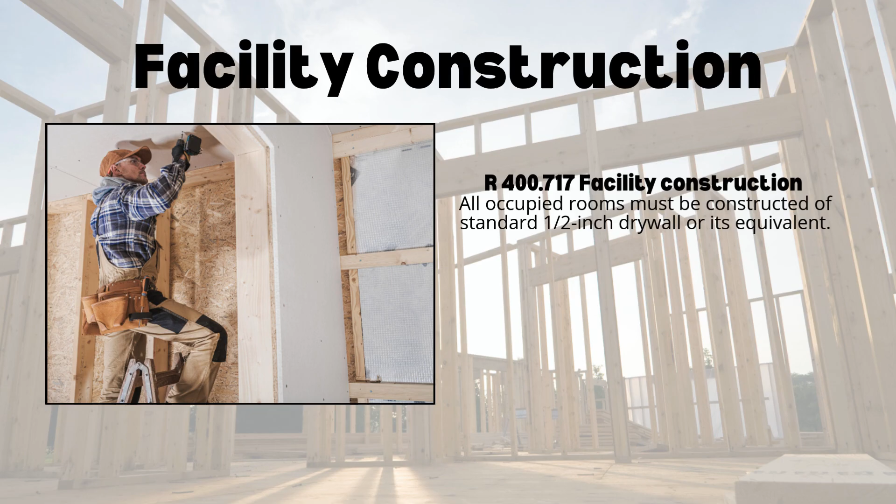Interior finishes must be at least Class C materials throughout the facility. Interior finish materials must be securely attached to or furred out not more than 1 inch from walls or ceilings that are drywall, plaster, masonry, or natural solid wood that are not less than 3/4 of an inch thick.

The term throughout, as used in this requirement, means the entire home, including all rooms, basements, and attached garages. Any materials covering the basic interior construction, such as wood or vinyl paneling, ceiling tiles, or the like, must minimally meet the Class C classification.

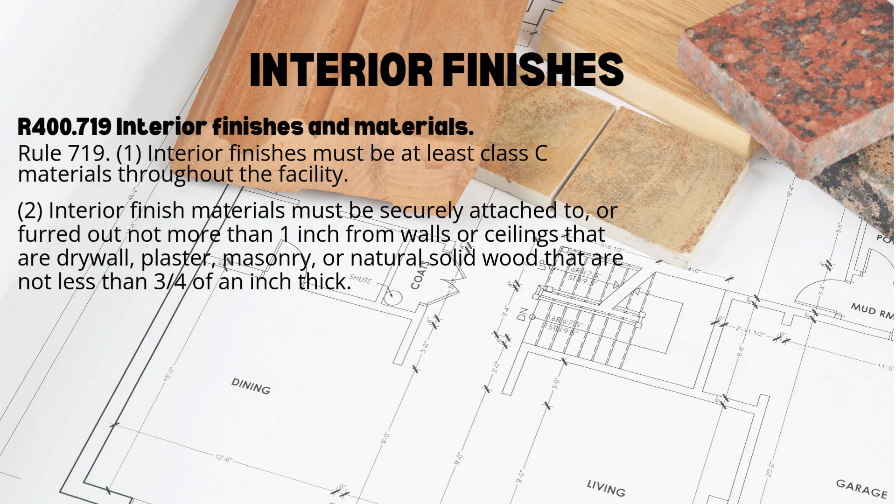Documentation from the manufacturer's literature provided by the licensee may meet compliance with this requirement, or it may be stamped on the material.

Wallpaper is permitted if the applicant licensee is able to provide verification that the wallpaper meets Class C classification. The coating of paneling to achieve a Class C finish is prohibited for applicants, change of ownership, new construction, or conversions, since it is not possible to determine whether the coating was applied and maintained in a manner that would achieve a Class C rating.

Interior finishes in existing licensed homes that have been coated with a fire-retardant coating and previously approved are acceptable. For those homes, licensees must be able to provide information as to what has been done to maintain the coating at each inspection. Generally, fire-retardant coatings do not maintain their effectiveness when washed or when brushed up against often. Fire-retardant coatings are to be reapplied on a routine basis as required by the manufacturer's specifications.

It is strongly recommended licensees keep all documentation of interior finishes, class ratings, and fire-retardant finish materials used in the facility.

Attaching of interior finish materials other than drywall, plaster, or natural solid wood that is not less than 3/4 of an inch thick directly to wall studs or to floor or ceiling joists is prohibited.

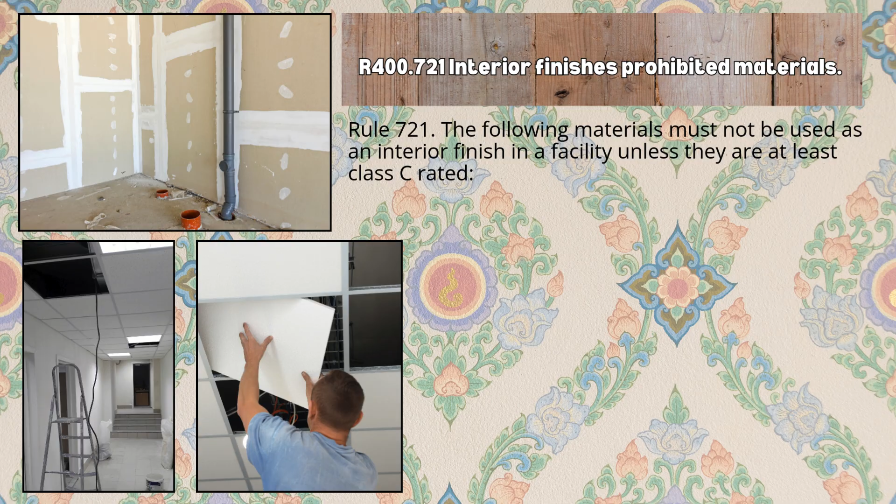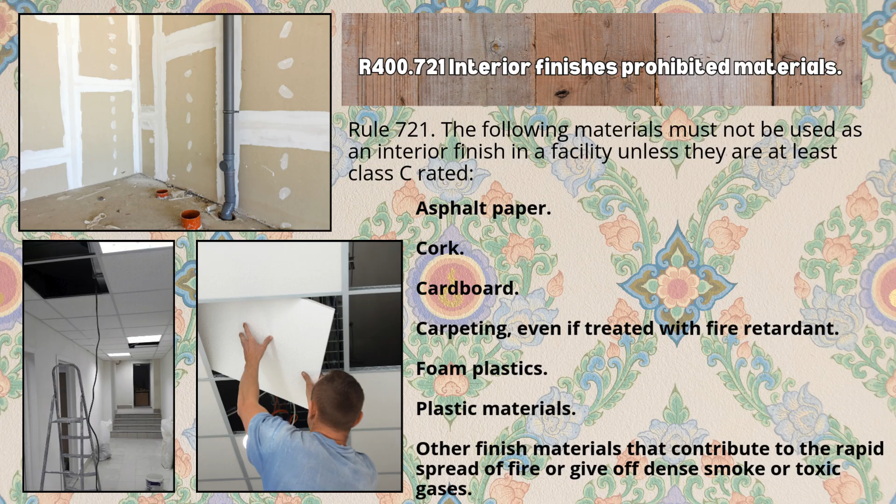The following materials must not be used as an interior finish in a facility unless they are at least Class C rated: asphalt paper, cork, cardboard, carpeting, even if treated with fire retardant, foam plastics, plastic materials, and other finish materials that contribute to the rapid spread of fire or give off dense smoke or toxic gases.

A minimum of one 5-pound multi-purpose fire extinguisher or equivalent must be provided for use on each occupied floor and in the basement. Occupied floor means those areas of the home containing bedrooms, dining rooms, and recreation activity rooms occupied by residents or members of the household.

Fire extinguishers must be present and operable. The licensee and direct care staff must know how to operate the extinguisher. Fire extinguishers must be examined and maintained as recommended by the manufacturer.

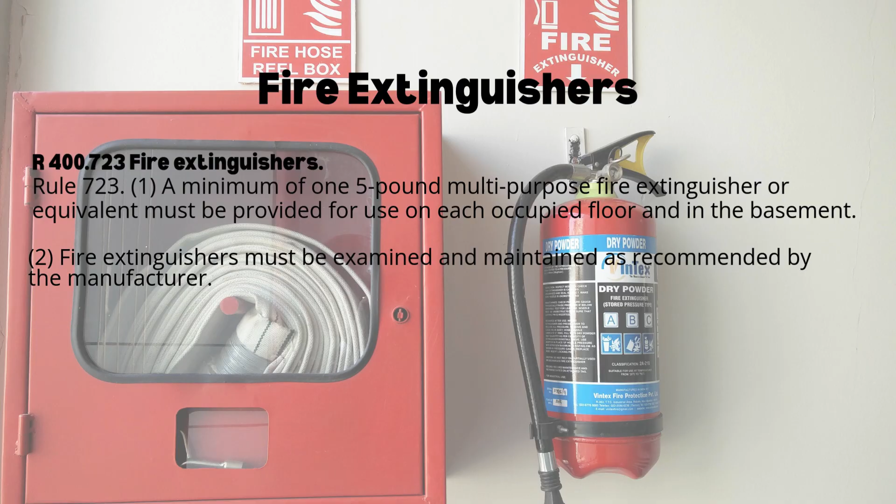A means of egress must be considered the entire way and method of passage through the facility and out an exit door to free and safe ground outside the facility, and must be arranged and maintained to provide free and unobstructed egress from all parts of the facility. A means of egress is an unobstructed passageway from anywhere in the building, leading to safe ground outside the building.

Such obstacles may include trash containers in hallways, furniture which may protrude into a passageway, loose carpeting or floor tile, baby gates, locked doors, and other obvious hazards. An egress window is considered an emergency escape and is not an approved means of egress. Partial doorways, such as Dutch door arrangements or gates that are constructed for an open stairway, must not interfere with the pathway to the exit.

One of the required exits can be through the garage, but only through a service door. The passageway through the garage itself is to be kept clear, even when the garage is used for storage of automobiles, lawn equipment, power tools, dog kennels, etc.

Where basements are regularly utilized for resident activities, there must be 2 approved means of egress, one of which leads directly outside. A basement is defined as that floor or story of a home below the street floor that has more than 50% of its floor-to-ceiling dimension below grade for more than 50% of the perimeter of the home. When a basement is regularly used by residents for recreation, workshops, classes, watching TV, lounging, etc., the basement must have 2 acceptable ways out.

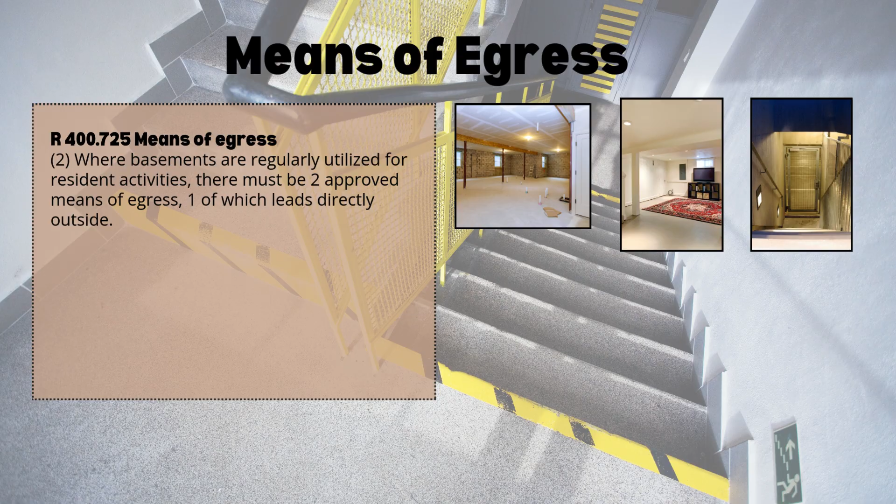Regular use does not include occasional entry by a resident to the basement for a short period of time to do laundry, to obtain something from storage, etc. Basements used in times of emergency and related drills by AFC residents do not constitute regular use and would not require 2 means of egress when used for those circumstances. One of the 2 means of egress may be an interior stairway that terminates on the floor above. The 2 means of egress are to be as far apart as feasibly possible.

Doors that form a part of a required means of egress must be equipped with positive latching, non-locking against egress hardware, and have a width to allow for residents requiring wheelchairs or other devices to easily navigate through doorways. If a required means of egress passes through a garage, the door used must be a positive latching door equipped with non-locking against egress hardware.

The rules do not prohibit the use of exterior sliding glass doors as a means of egress. However, sliding glass doors must be equipped with positive latching, non-locking against egress hardware. If unable to open the glass door with a single motion, the sliding glass door cannot be considered a means of egress. The door may not be secured by wedges, Charlie bars, key locking mechanisms, deadbolts, etc. This would also apply to exiting from a garage. The first floor of the facility must have not less than 2 separate and independent means of egress leading to the outside.

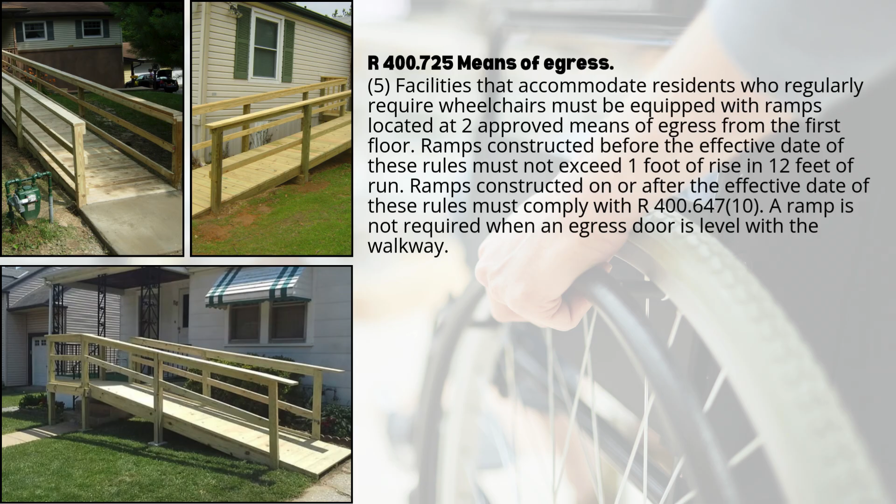Facilities that accommodate residents who regularly require wheelchairs must be equipped with ramps located at 2 approved means of egress from the first floor. Ramps constructed before the effective date of these rules, November 3, 2025, must not exceed 1 foot of rise in 12 feet of run. Ramps constructed on or after the effective date of these rules must comply with rule ending in 647, Subrule 10. A ramp is not required when an egress door is level with the walkway.

At least one single-station battery-operated smoke alarm must be installed in the following locations: between the sleeping areas and the rest of the facility. In facilities with more than one sleeping area, a smoke alarm must be installed to protect each separate sleeping area and on each occupied floor, in the basement and in areas of the facility that contain flame or heat-producing equipment. A single-station smoke detector is an independent unit that is generally more effective when mounted on a ceiling. Such a unit requires no special wiring. It may be plugged into an ordinary AC outlet or may be battery-powered.

Approved heat detectors may be installed in the kitchen and in other areas of the facility containing flame or heat-producing equipment in lieu of smoke alarms. A heat detector may be used in place of a smoke detector in areas of the home containing heat or flame-producing equipment, where dust particles and extreme temperature and humidity changes could interfere with a smoke detector's efficiency. Areas of the home where heat detectors could be installed include the kitchen, furnace room, garage, or in some cases, the bathroom. If heat detectors are used, they must be operable and in good working order. If batteries are used as a source of energy, the batteries must be replaced in accordance with the recommendations of the alarm equipment manufacturer.

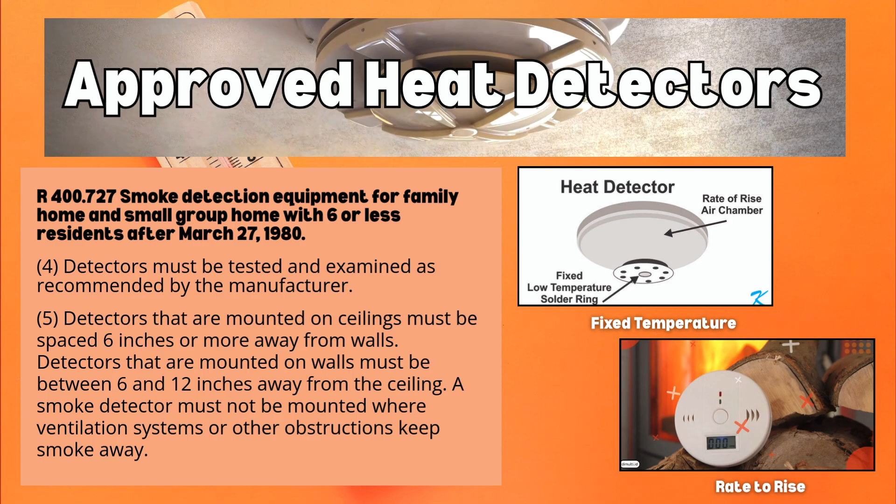According to rule ending in 727, Subrule 6, for new construction, conversions to an adult foster care facility and changes of adult foster care licensing type, approved smoke alarms must be installed in accordance with the requirements contained in the National Fire Protection Association's Life Safety Code, powered from the building's electrical system, and when activated, initiate an alarm that is audible in all sleeping rooms with the doors closed. Smoke alarms must be installed on all levels, including basements but excluding crawl spaces and unfinished attics. Additional smoke alarms must be installed in living rooms, dens, day rooms, and similar spaces.

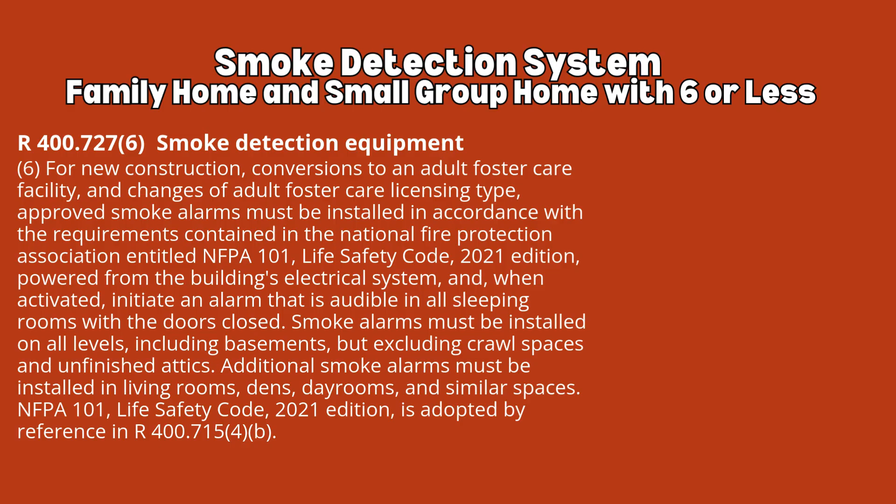All new adult foster care applicants are required to install a smoke detection system into their building's electrical system. This sub-rule applies to homes that fall under new construction, conversion, change of category, or change of licensee. Any change in licensee, regardless of whether the facility has been continuously licensed or not, is a conversion and requires the installation of the smoke detection system into the building's electrical system. For additions added to existing licensed homes, only the addition needs to meet the requirements of this rule. Battery-operated smoke detectors may remain in the existing portion of the home.

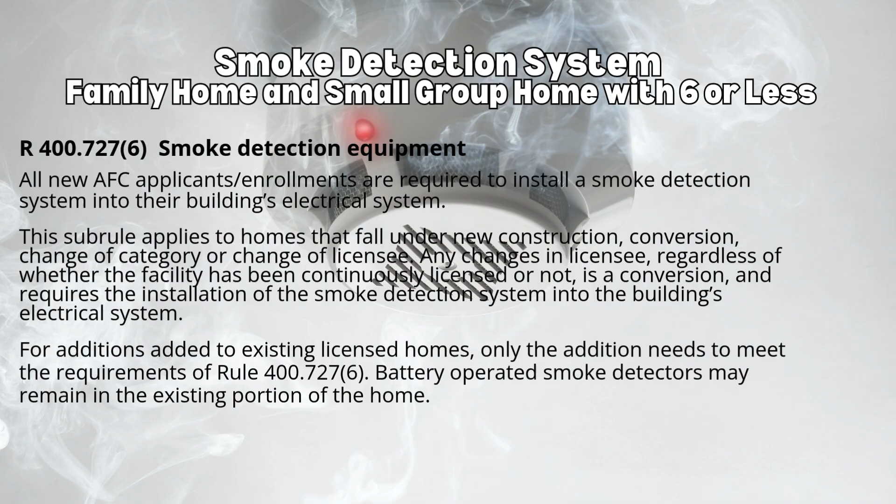Subrule 7 of this rule indicates that instead of the approved smoke alarms being powered by the facility's electrical service, per Subrule 6 of this rule, a wireless system in compliance with the National Fire Alarm and Signaling Code is accepted. The other requirements in Subrule 6 of this rule still apply.

According to rule ending in 729, Subrule 1, heat must be provided by an approved central heating plant or a permanently installed electrical heating system that is approved by a nationally recognized testing laboratory that uses acceptable testing methods. An approved heating plant is defined as a central heating system that disperses heat throughout the building via pipes or ducts. This central heating system can be fueled by oil, gas, electricity, or solid fuel.

Subrule 2 of this rule indicates that a furnace, water heater, heating appliances, pipes, wood-burning stoves and furnaces, and other flame or heat-producing equipment must be installed in a fixed or permanent manner, and in accordance with a manufacturer's instructions and maintained in a safe condition.

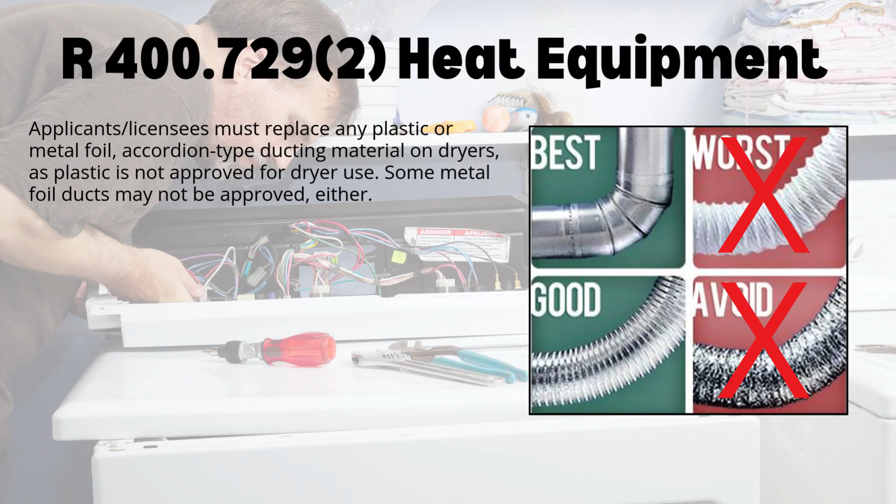Clothes dryers must be properly vented to the outside using permanent metal ductwork. Applicants and licensees must replace any plastic or metal foil accordion-type ducting material on dryers, as plastic is not approved for dryer use. Some metal foil ducts may not be approved either. Applicants and licensees must replace these ducts with rigid ducts or corrugated semi-rigid metal ducts.

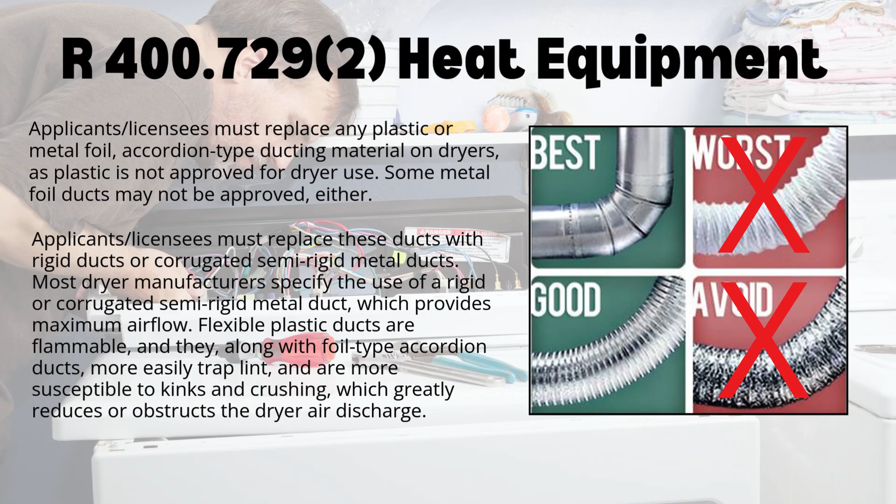Most dryer manufacturers specify the use of a rigid or corrugated semi-rigid metal duct, which provides maximum airflow. Flexible plastic ducts are flammable, and they, along with foil-type accordion ducts, more easily trap lint and are more susceptible to kinks and crushing, which greatly reduces or obstructs the dryer air discharge.

Where conditions indicate a need for inspection, heat-producing equipment must be inspected by a qualified inspection service. A copy of the written approval from the qualified inspection service must be submitted to the department on request. If there is reason to believe there may be a problem with the heating equipment, an inspection by a licensed HVAC technician and/or certified chimney sweep must be obtained. The licensee must be able to demonstrate chimney safety has been maintained. Frequency of chimney cleaning is dependent on the frequency of use.

Fireplaces of masonry construction or factory-built fireplaces will be acceptable as a means of supplemental heat only if they are equipped with an approved spark screen or glass shield. The installation or construction or use of fireplaces in sleeping areas or hazardous areas will not be approved. A fireplace is generally defined as a unit composed of a hearth, a fire chamber or similar prepared place, and a chimney.

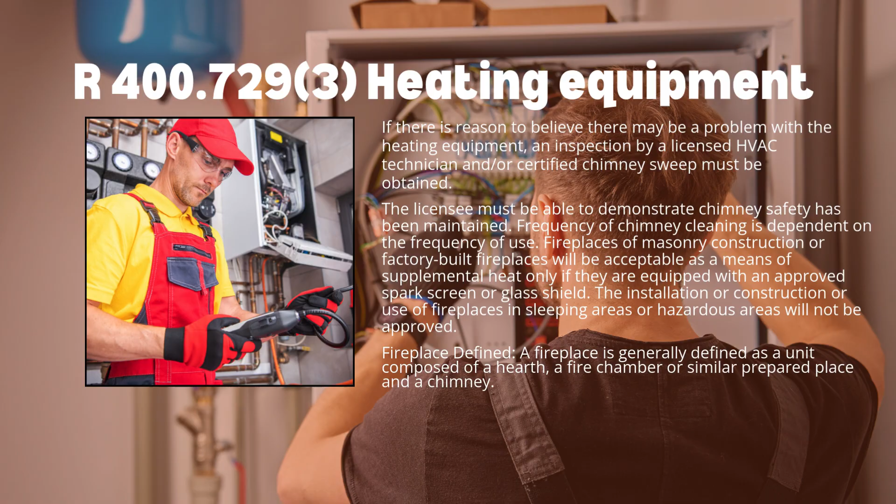Subrule 4 of this rule indicates that portable heating units are allowed if they are Underwriters Laboratories listed and equipped with a tip-over sensor and a temperature overheat sensor. Portable heating units must not be plugged into an extension cord or power strip and must be used in accordance with manufacturers' recommendations and guidelines. Documentation showing compliance with these requirements must be maintained at the facility and available for inspection.

When determining if use and placement of a portable heating unit is appropriate, the resident population served and ensuring their safety must be taken into account. The use of heating blankets and heated mattresses is prohibited.

If the heating plant is in the basement, floor separation made from standard building material must be created either at the top of the stairs leading to the basement or at the bottom of the stairs leading to the basement. Floor separation must include at least a 1 3/4 inch solid core wood door or equivalent, equipped with an automatic self-closing device.

Heating plants and other flame-producing equipment located on the same level as the residence must be enclosed in a room that is constructed of material that has a 1-hour fire resistance rating, as well as a door made of 1 3/4 inch solid core wood. The door must be hung in a fully stopped wood or steel frame and must be equipped with an automatic self-closing device and positive latching hardware. A permanent outside vent that cannot be closed must be incorporated in the design of heating plant rooms so that adequate air for proper combustion is assured.

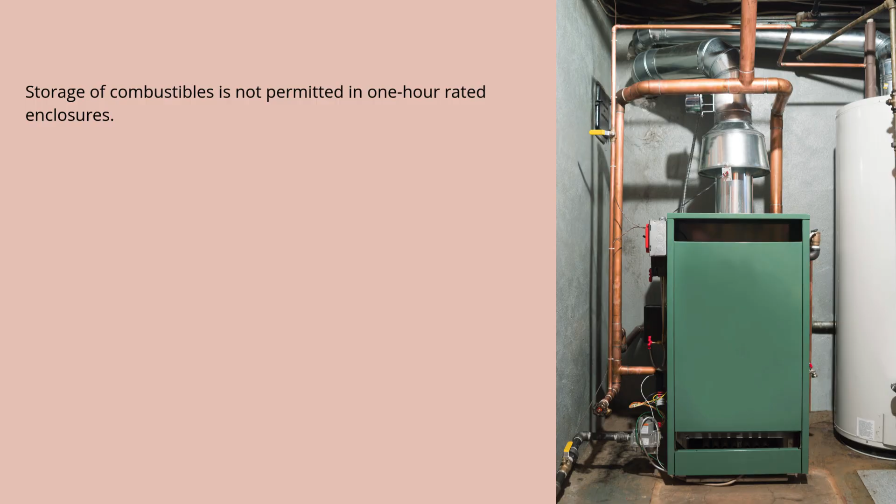Combustible materials must not be stored in rooms that contain heating equipment, water heaters, incinerators, or other flame-producing equipment. Combustible materials refer to those materials which catch fire, burn, or smolder when subjected to various degrees of heat. Such materials would include, but are not limited to, flammable liquids, paper, cloth, wood, plastic, vinyl, and leather. Storage of combustibles is not permitted in 1-hour rated enclosures.

If there is no heat plant enclosure, and the heat plant and/or flame-producing water heater is in an open area in the basement, then any storage of combustible materials must be located as far away from the units as possible, but no closer than 4 feet to that heating unit or water heater.

Thank you for watching our short video training on the fire safety rules in family homes and small group homes with 6 residents or less, licensed after March 27, 1980. We hope to see you soon.